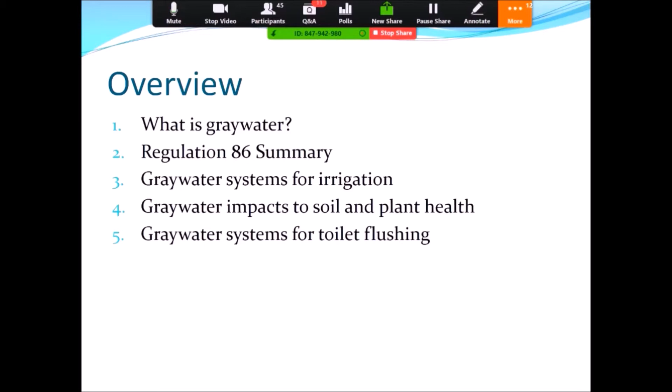So I'll talk about what is graywater and some of the benefits that can be achieved by its use. A summary of Regulation 86, which is the regulation that came out to allow uses of graywater. And then I'll talk about graywater systems for irrigation and how those can be set up, and how graywater impacts soil and plant health that can be associated with those irrigation systems. And finally, I'll also talk a little bit about the graywater systems that can be used for toilet flushing.

Okay, so starting right off with what is graywater. Graywater is going to be all of the wastewater generated in the home, excluding the toilet water and the kitchen water. So what it does include is shower and bath water, laundry water, and water from hand wash sinks and wash basins. So by excluding toilet water and kitchen water, you're excluding the water that's more highly contaminated.

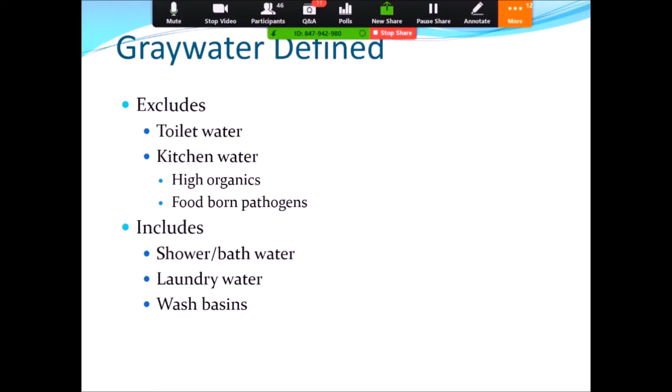Sometimes people do ask, why do we exclude kitchen water? Because that could be not as contaminated as toilet water. However, there's a really high organic content in kitchen water resulting from food, particularly when there's garbage disposals. But even when there's not a garbage disposal, just rinsing from plates and things results in really high organic matter and the potential for foodborne pathogens if eggs or raw meat or anything like that is prepared in the kitchen. So it's a water source that needs a higher level of treatment than those other graywater sources like laundry and shower water.

Okay, so here's a pie chart of the uses of water inside the home. If we look at the sources of gray water—the shower, clothes washer, and some portion of the faucets, capturing hand wash basins but not kitchen faucets—that's near 50% of the wastewater generated in a home. And you can see that toilets are about 27%, so you could meet all of your toilet demand with gray water and still have some left over for irrigation.

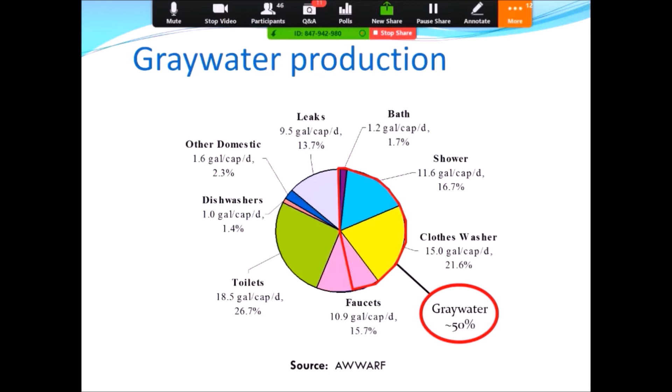Okay, so because gray water is about half of the water that's generated from wastewater in the home, there's a large potential for water demand reduction through gray water. For example, Colorado's Front Range population is expected to grow from 4.3 to 6.2 million persons by the year 2035, increasing residential water demand by 285,000 acre feet per year.

Use of residential gray water for toilet flushing and landscape irrigation in new housing developments alone could reduce this demand by 30%. So the realized water savings of 85,000 acre feet per year out of that 285,000 represents a significant reduction in the water supply gap identified in the Colorado Water Plan.

And it also reduces household wastewater flows by up to 50%, which can provide some benefit in terms of needing new infrastructure to support all of this population as well.

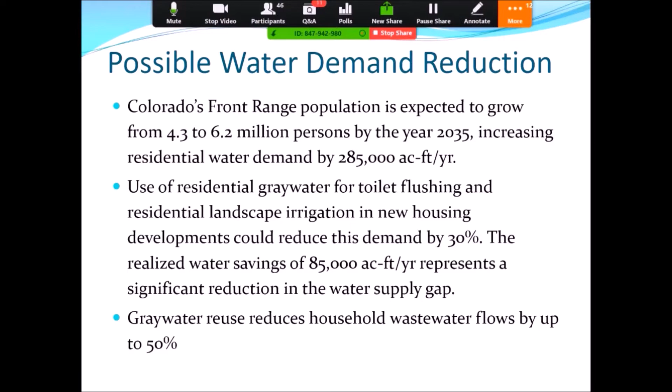Okay, so gray water quality—what is in gray water? Primarily, the major constituent in gray water is really going to be the soaps and detergents we use in our household products. That results in some organic content in gray water.

This table compares gray water quality to domestic wastewater that includes toilet and kitchen water. Our measures of organic matter are the first two on top, biochemical oxygen demand or BOD and chemical oxygen demand. Those are quite a bit lower than what we have in domestic wastewater, but still present. Gray water has some nitrogen and phosphorus present, but at lower concentrations than in wastewater, which can be beneficial for plant growth.

We do see indicator organisms in gray water, which means fecal matter does ultimately end up in gray water. So when someone washes their hands after using the restroom, there's potential for that material to enter into the system. So we do have to take proper precautions to protect human health when using gray water. Of course, those levels are much lower than what we see in domestic wastewater.

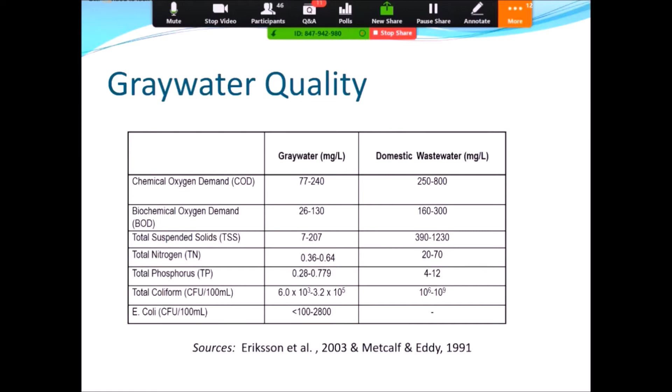Okay, so let's talk a little bit more about Regulation 86. It allows for gray water use, including both irrigation and toilet flushing. One key thing in the legislation is that cities could choose to adopt ordinances to allow gray water, or they could select not to. At this time, the only city that actually has an ordinance written to allow gray water use based on these regulations is the city of Denver.

Other cities are, I think, working to develop ordinances but have not done so yet. So that's one consideration—the legislation was written to not force cities or counties to allow gray water use, leaving that as a choice for each particular city or county.

So these regulations are separated into four categories: A, B, C, and D. A and B are irrigation categories, and C and D are toilet flushing categories. In each of these end uses, they're categorized based on scale as well. Type A systems are single family, whereas type B systems are non-single family. C is single family for toilet flushing, and D is non-single family for toilet flushing.

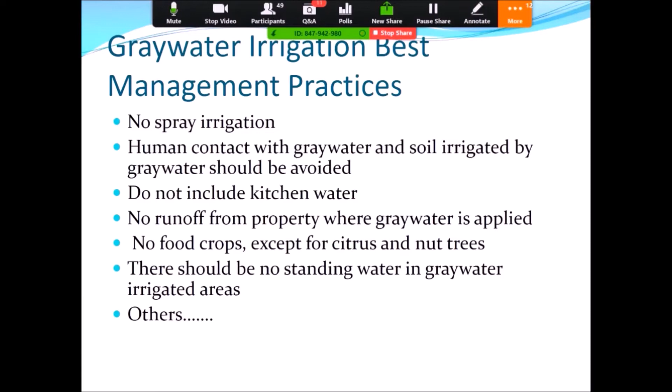There's many other best management practices linked with these regulations, and in general for gray water systems, these are just the most important ones. Okay, so let's look more at how these systems look.

So those are some landscape types. The first gray water irrigation system is a really simple system that's easy to retrofit homes for, called a laundry to landscape system. In this system, there's a washing machine, and it makes use of the pump already in your washing machine to pump water outdoors into mulch beds.

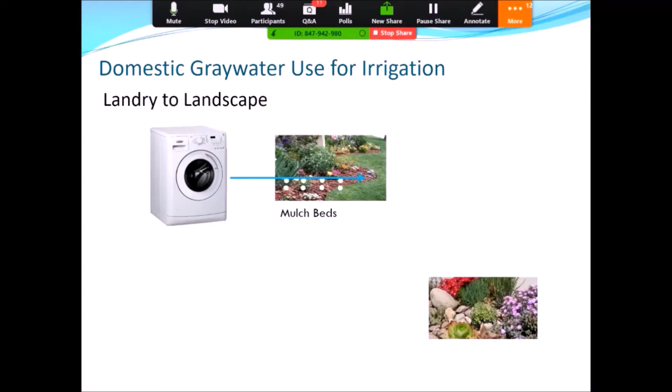Several cities in California have programs that incentivize and provide equipment for this type of system, using buried lines that go out into the mulch beds. Other systems can collect all household gray water from sources like bathtubs, showers, and hand wash sinks, store that gray water in a tank, use some filtration.

Our state requires 60 mesh filtration, then supplies that water out to drip irrigation systems. So the second type of system is a little more complex, but it also enables use of more of the gray water generated in a home.

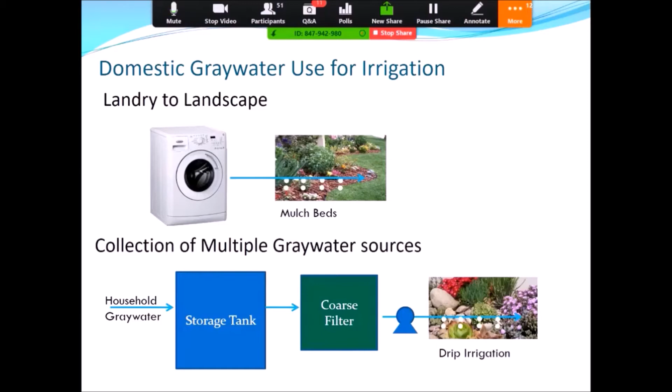Okay, so let's start with these laundry to landscape systems. I mentioned several cities in California subsidize these. San Francisco is one, Long Beach, California has also done it, as well as Los Angeles. They provide a $112 subsidy toward a $117 kit, and also provide workshops for education on how to set these systems up.

They have a toolkit people can rent for installation, and several guidebooks online for how to do these, which can be a really good resource if you're interested in this kind of system, which is legal and allowed through our state regulation 86.

So like I said, these systems make use of a pump already existing in your washing machine, and when that drains, the water gets pumped outdoors, going into these different mulch basins, so water can be distributed to these areas.

There's often valves throughout the yard, so you can turn a certain part off maybe for one load of laundry and let one part of the yard be irrigated, then turn that off for your next laundry load and let the next load go to a different area of the yard.

So these are pretty simple systems, and they really don't require a lot of retrofitting in the home. If you can connect an irrigation system to it, then you can get going with that without renovating your home at all. Oftentimes when people do these, they end up doing a lot of new landscaping when they get these new irrigation lines set up.

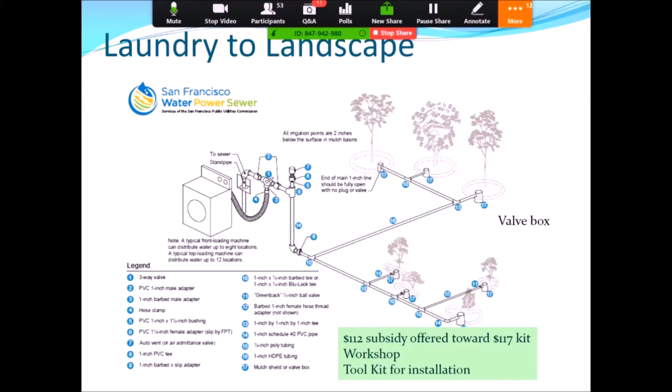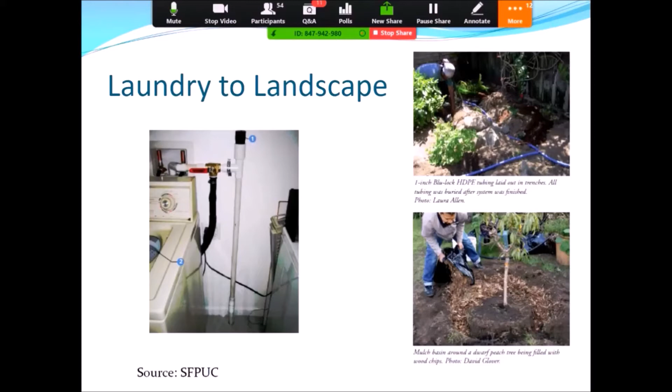And then these are pictures of these mulch basins and the piping that would supply water into those. You can see here how these pipes go around the irrigation area, and then they supply water around the landscape and get that water distributed there.

So that's the laundry to landscape system, which really doesn't require a lot of retrofitting in the home. Now, if we want to collect all of the graywater in the home, there's these different sources we've talked about - the laundry, sinks, the bathtubs - and you can collect all of those in some kind of storage tank. That water can be used either for flushing toilets or for landscape irrigation. But as you can see here, it would oftentimes require some retrofitting.

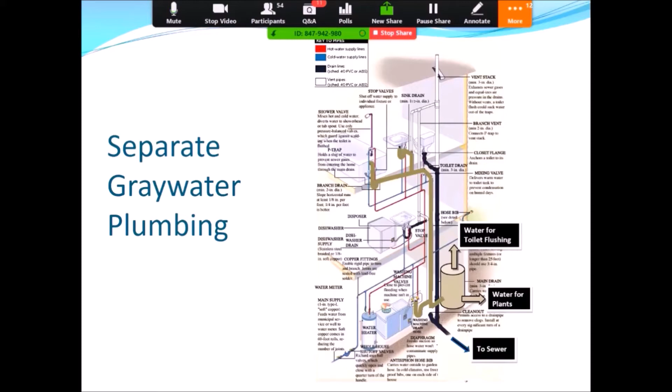In new construction, it's pretty simple to just separate these collection systems for graywater and black water. However, when you're dealing with existing homes, typically your bathtub, shower, and bathroom sink are combined with the toilet right in the bathroom. So a lot of times you're breaking into drywall and things to get all of your plumbing separated. Now there can be some easy to access sources of graywater as well.

Okay, so this is what these kinds of systems can look like that include collection of all the graywater, and this shows a picture of a storage tank. Oftentimes those storage tanks are going to be something like 100 to 200 gallons, about the size of a water heater that you would have in the home. So your graywater is collected here in a tank, and this one's in a basement, which would be pretty common. Some people also have these outdoors, either on a ground surface or below ground.

And here's the kind of components that are really needed. This is a coarse filter, about 60 mesh, and then there's a pump that's required to pump that water out into a drip irrigation system. An important component you see down there too is also the drain. You need to have a drain in your system, particularly here in Colorado, where we have a season where we wouldn't be irrigating. You would turn on your drain, drain your tank, and allow the graywater to then just go to sewer for that duration. But also, if you have to maintain your tank at all, or do any sort of activity, or if you just don't want to use the graywater, you need to have a drain to allow that to still go to sewer.

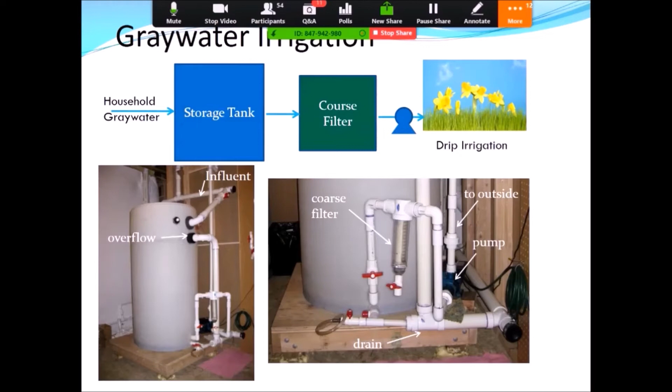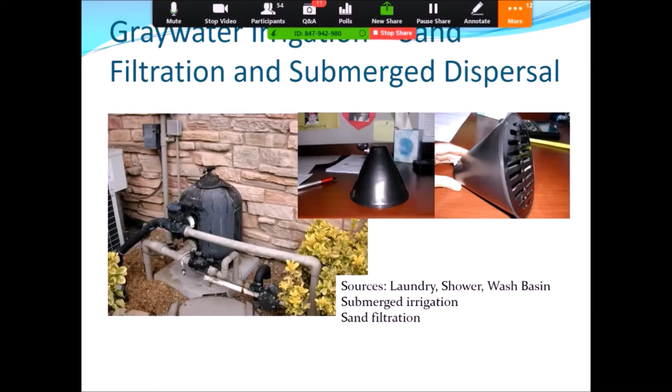Those are designed in a way that they can be planted under a grass area so that the grass roots would not get into the emitters. One of the problems when you have drip irrigation in grass areas is clogging from the roots. This kind of system, when placed down like this, does not allow the roots to get up and clog those, so that's a pretty nice system. This particular one that I took a picture of had been installed for 8 years with those emitters underground, and they had no maintenance or problems with that system in the time they'd been running it.

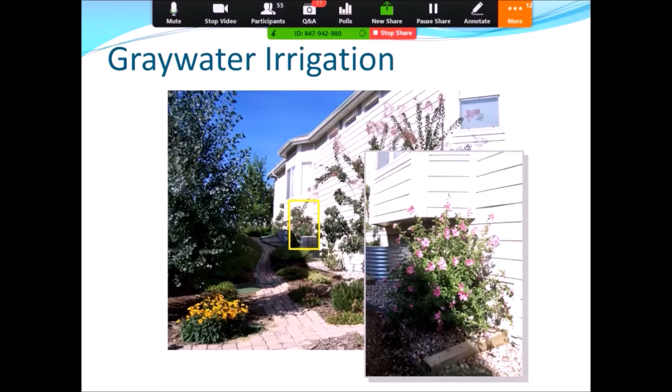We did a national study on gray water use for irrigation and its impacts to soil and plant health. This was a really nice control area because the neighbor was irrigating with municipal water, and there were similar landscapes, so we could really compare gray water irrigated areas to areas irrigated with municipally supplied potable water.

That study is documented in this report from Water Environment Research Foundation. It's freely available online, so if you go to the WERF website you can download that report. It has a lot of technical details if you're interested in going beyond what I talked about today.

Okay, so plant health. I mentioned already that Rose of Sharon that's doing really well. All of the grasses that we tested did really well. Most landscape that we looked at in this study, a national study where we collected samples of soil and plants in several states including California, Texas, Arizona, Colorado—those were the major ones, I think.

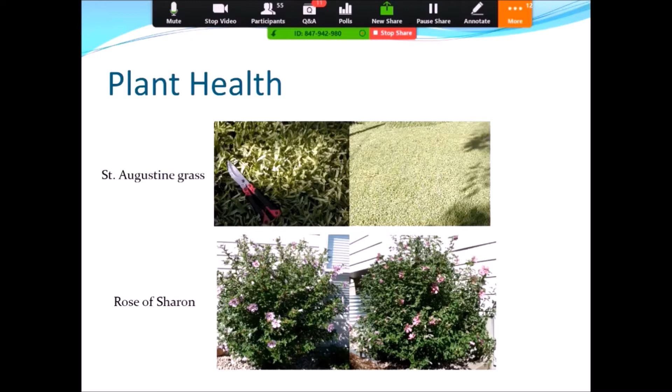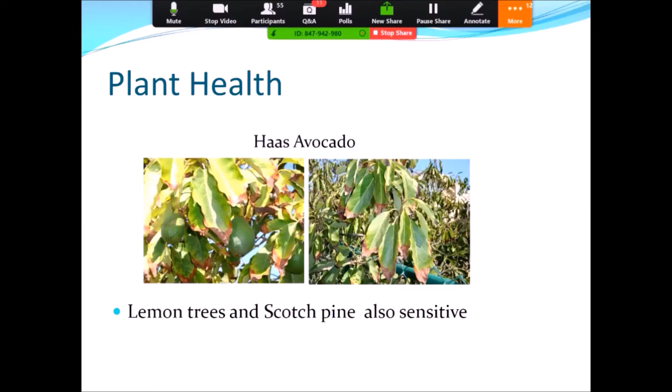So there are probably some general soil health issues in this area, but ultimately the photo on the right, you see no fruit essentially associated with that, and that one's not doing so well. Lemon trees we also found to be sensitive, and Scotch pine. So there are landscape recommendations when you're using gray water.

Just some summary of the results from this study in terms of impacts to the soil and plant health: really, there were no major concerns noted for use of gray water for irrigation. We found a couple of those types of landscape plants, or even fruit plants, that were sensitive, but there were really no major concerns of all the things we studied in terms of either soil or plant health.

Okay, so a couple of things: we did see salts, boron, and antimicrobials accumulate in gray water irrigated soils. Antimicrobials are present in a lot of hand soaps, marketed to kill viruses and bacteria. However, they do persist in our environment, and we found that areas irrigated with gray water had elevated levels of those, as well as salt and boron. All of these three components can be avoided through best practices.

For example, laundry detergents have a lot more salts when they're powder detergent rather than liquid detergents. So if you're using your gray water to irrigate landscape, it's recommended that you use more liquid detergent and products that don't contain boron. And if you're concerned about environmental impacts from antimicrobials in soaps, you could select hand soaps that don't include those ingredients.

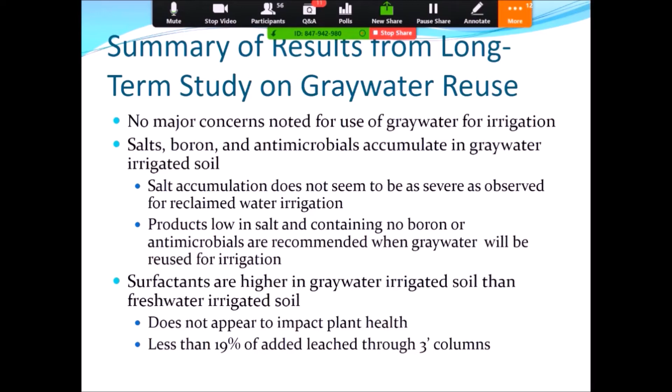And there's a kind of constant biodegradation of those products. So most of your detergents and soap products are going to contain these surfactants, but they are biodegradable, and companies have to show biodegradability before they can put those onto the market. So those were not a major concern.

Nitrogen and salts have some potential to leach through soil, so that's one thing that should be considered. The best thing there is to make sure you're not irrigating in areas where the groundwater table is very high.

With respect to health impacts, we didn't see a consistent increase in indicator organisms in gray water irrigated soils compared to freshwater irrigated. There are pathogens, like we said, potentially present in gray water, and therefore to avoid human exposure, drip lines should be used, and we've talked about that already, and all of the states already really have that within their best practices and regulations.

Most plants were healthy under gray water irrigation. We had 22 species evaluated, and 3 of those were determined to be sensitive. The nutrients in gray water were really found to be beneficial, and when applying gray water, one should really reduce or eliminate fertilizer input, because you're already adding the nitrogen and phosphorus through your gray water source.

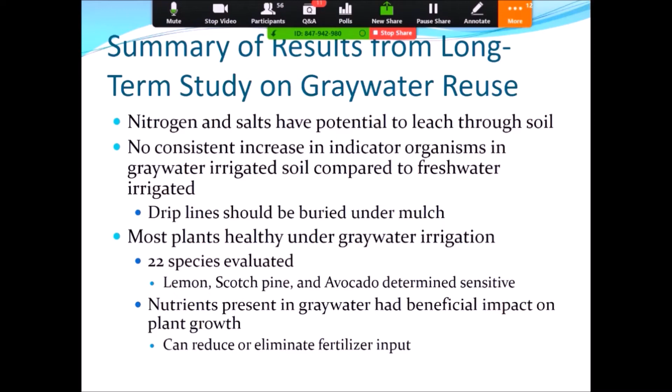Okay, so let's talk a little bit about use of gray water for toilet flushing. Gray water systems for toilet flushing have a definite potential for human exposure. Unlike the systems we've looked at so far for gray water use for irrigation, where we took a lot of barriers to prevent exposure from humans to gray water, with the toilet, there is that potential for exposure. We even have the potential that children could go and play in the toilet, or which they do.

And also, every time you flush the toilet, the reality is we actually ingest some very small quantity of water every time we flush a toilet. So therefore, the treatment for gray water when it's used for toilet flushing is more extensive than what we were looking at for irrigation systems.

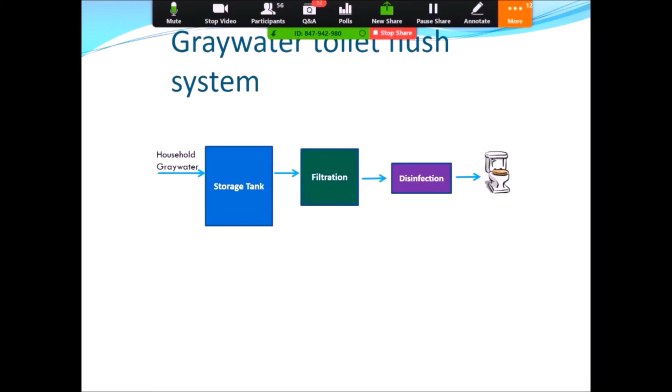There's really never going to be systems that just take gray water straight from its source and plumb it to a toilet, that would be legal, I should say. I'm sure people have those, but they're not legal. So in these kind of systems, you can see we have filtration and a disinfection step, and that disinfection step is there to remove pathogens, bacteria, virus, giardia, anything like that that could end up in that water before it gets to the toilet.

Okay, so getting back now to Regulation 86 and what it allows for toilet flushing systems. Our state opted to go with only allowing systems that are certified by NSF, that's National Sanitation Foundation, and they have a certification process called NSF 350. Manufacturers can go through that certification process, and I'll talk more about the systems that are allowed through that.

And then if they achieve that level of certification, then they could be installed in homes in the state of Colorado. The difference between category C and D, when you have multi-residential or commercial systems, those have to be designed by a professional engineer. Also, the state health department wants to maintain a free chlorine residual between 0.2 and 4 milligrams per liter in this treated water to ensure public health and safety.

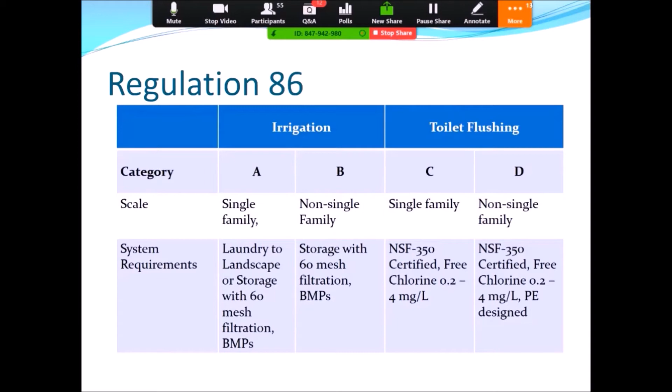Okay, so this is the NSF 350 certification requirements. NSF is an agency that certifies products to meet health standards, and they have a particular certification process for these household scale gray water systems. And they also address some commercial systems.

So for example, the class R that you see here is the residential systems, versus class C are systems that are between 400 gallons per day up to 1,500 gallons per day. So those are systems that would be larger than a typical single residential unit, and the standards are a little bit more strict for those systems. These are the water quality requirements for those systems to meet.

So you see organic matter is CBOD, we have turbidity, E. coli - that's the indicator organism to ensure there's enough inactivation of pathogens in the system. And then we have residual chlorine. Our state has made a more strict requirement for residual chlorine than this one.

So basically what happens is a technology provider or supplier of a gray water system would have to put their system through this testing, and NSF has a recipe of gray water that they have to make, and then they have to show that their system meets these standards for a particular period - I think it's 3 or 6 months - that it consistently meets these standards in terms of the average and single sample maximum requirements.

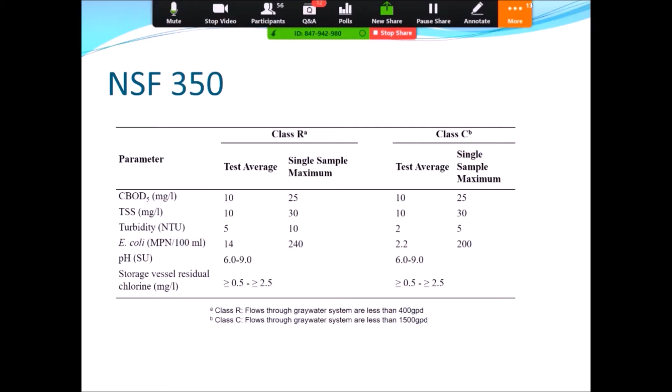So there's not too many systems available that have gone through the certification process. There are a couple - these are 4 technology providers that have systems that are NSF certified. These systems are all ones that could be installed in our state in a single residence. None of these systems are designed for or certified for the multi-residential or commercial scale. So we're still lacking in our ability to install systems at that scale, but these are all systems that could be installed in a residential household to allow gray water use for toilet flushing.

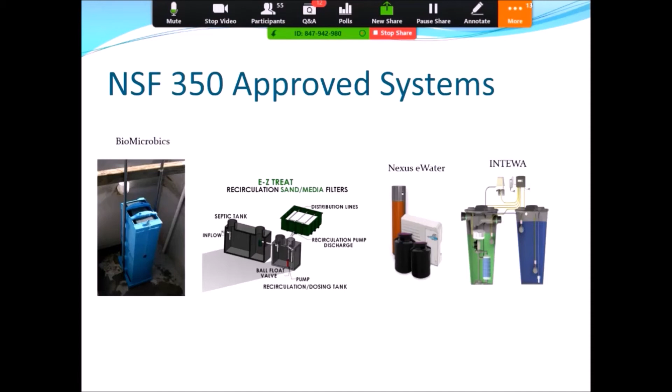Clearly here, we're dealing with systems that are a lot more complex than what we were looking at for the gray water irrigation systems. So there's potential for maintenance on these and higher installation kind of costs as well.

Okay, so when we are using gray water to flush toilets, the storage tank and the whole system design really has to be a little bit more complex as well. The reason for that is that toilets need to always have a water supply. So the systems need to also be connected to a municipal or potable water supply, and therefore they need backflow preventers.

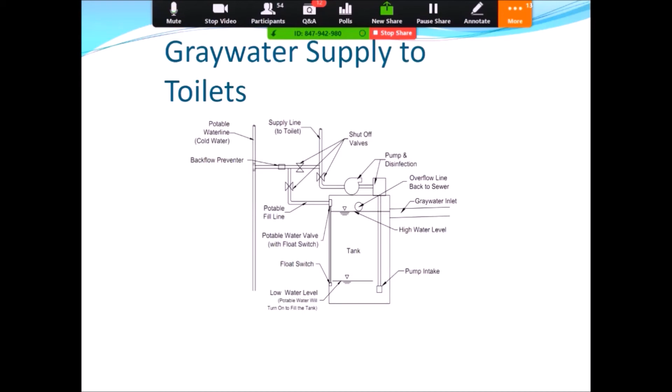They typically have some kind of valves and switches that enable, when the water empties, for potable water to get into the tank to supply toilets. So not only are the treatment systems more complex, but also the storage tanks and distribution of water gets a little bit more complex as well.

So this kind of shows the process that can be involved with all of that I just talked about. For example, one of the systems we designed for a residence hall here - this is how it worked. We have maximum tank level, and as water was used in that tank down to a certain level, a gray water valve would open, and then gray water from a storage tank would come into the system. It would be dosed with chlorine on its way into the system. So then we have a full tank again, and that water can be supplied out to the toilets.

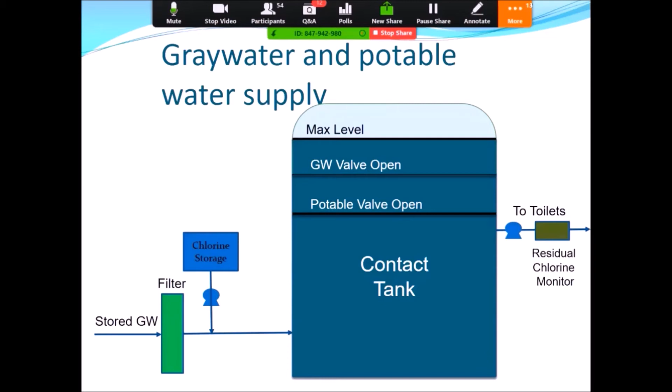Now, what happens though if there's no gray water to come in? If the gray water valve opens and no gray water comes in and the water continues to empty, then you have a potable water valve that opens and allows potable water into the system. But what that does mean is that you need to take care of potential cross-contamination of your potable water supply.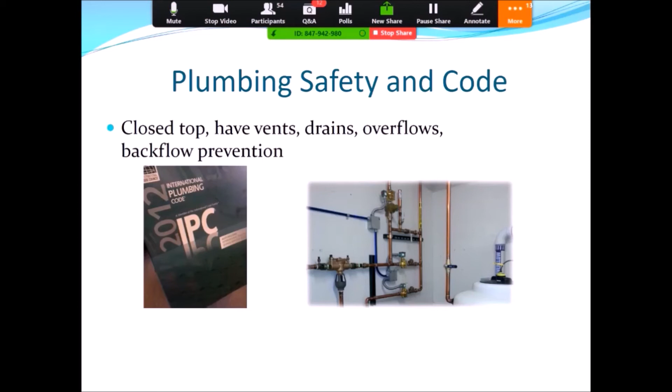We can also have these systems for multi-residential or commercial applications. Many buildings coming up in cities like San Francisco, Los Angeles, Portland, and Seattle are adopting large-scale urban buildings with gray water or wastewater reuse systems. They collect water through the building, treat it, and supply it back for toilet flushing. This picture shows what one of those systems looks like. They typically have a lot of online monitoring, controls, and more treatment, since a larger number of people can be exposed through those systems.

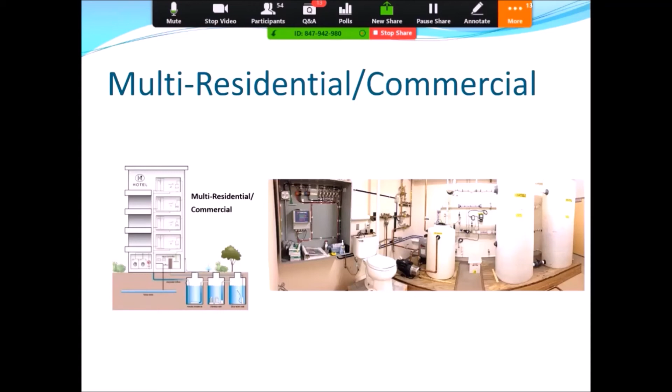So in summary, use of gray water definitely has the potential to reduce demand for potable water. Since half the wastewater in a household is gray water, that gives us a pretty large source that can be used to meet non-potable demands like irrigation or toilet flushing.

Regulation 86 is now in place to allow use of gray water for both irrigation and toilet flushing. That regulation allows laundry-to-landscape systems, which are very simple and don't require a lot of retrofitting in the home, making it a practical way to get started with a gray water system if a homeowner is interested.

Looking at impacts to soil quality and plant health, no major concerns have been identified for using gray water, as long as best practices are followed that limit human contact and drainage off the property.

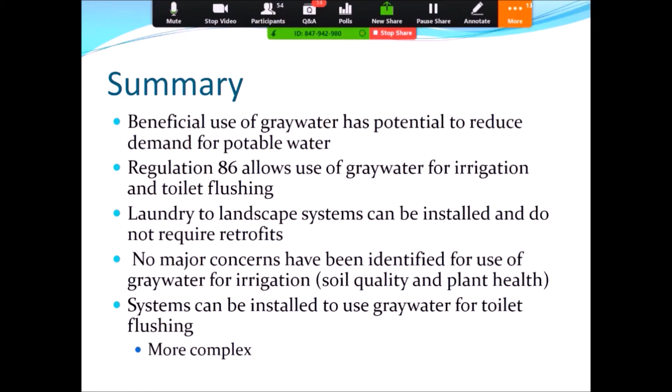Systems can also be installed for use of gray water for toilet flushing. These do a great job reducing demand for potable water, but they're more complex, and at the household scale that could be impractical for some homeowners. For others willing to take on that challenge, there are options available.

So with that, we can take questions.

What about gray water irrigation in the winter when plants are dormant? You should operate a gray water system just like any irrigation system. In the fall, you typically do a blowout of your irrigation system, and you should do that with gray water as well. That's why it's critical to have a connection to sewer. Over the winter months, when the ground is frozen, you shouldn't apply gray water to your landscape, and instead should divert it to the sewer, following the same practices as a blowout of a typical irrigation system. Likewise, with laundry-to-landscape systems, you'd shut off the valve over winter, and also blow out the distribution lines to make sure they don't freeze.